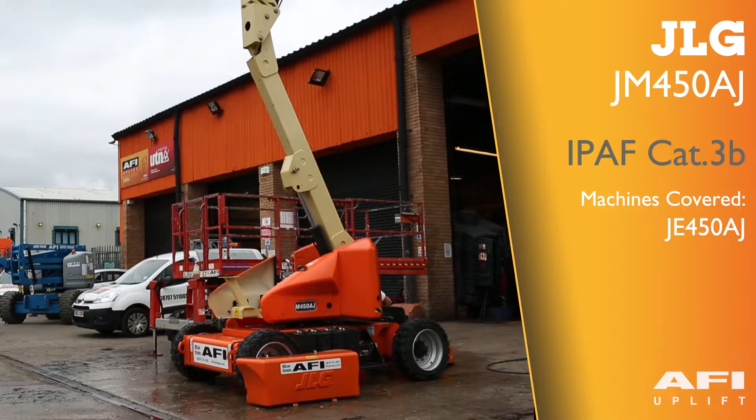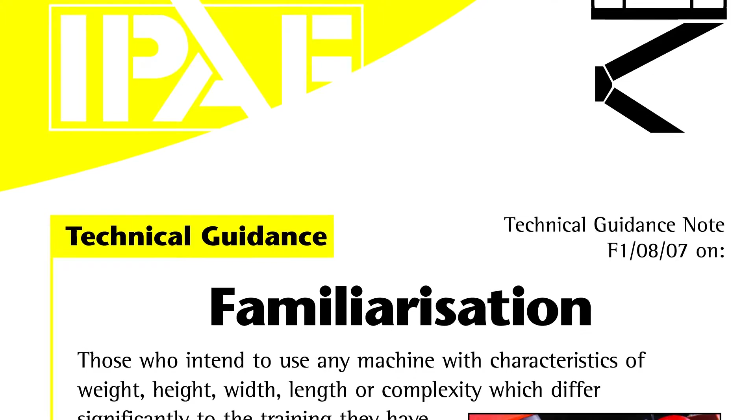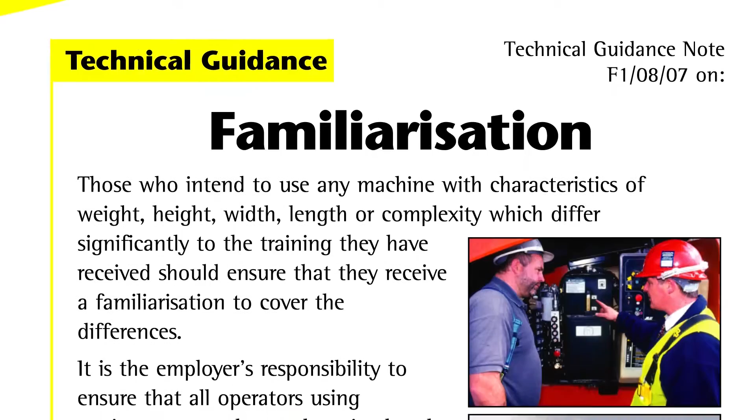Those who intend to use any machine with characteristics of weight, height, width, length or complexity which differ significantly from the training they have received should ensure that they receive a familiarisation to cover the differences. It is the employer's responsibility to ensure that all operators using equipment are adequately trained and familiarised to comply with current health and safety legislation.

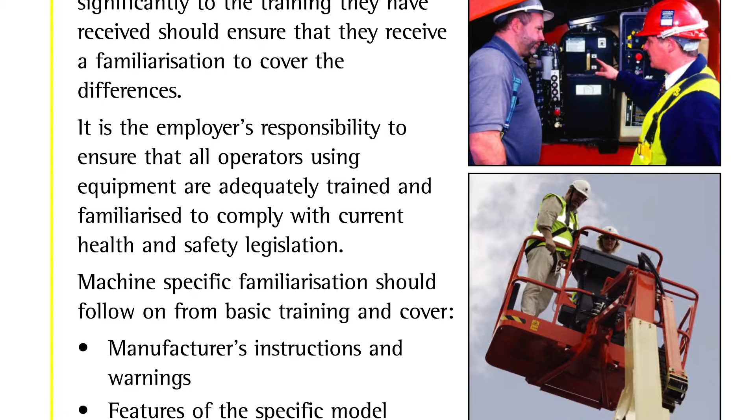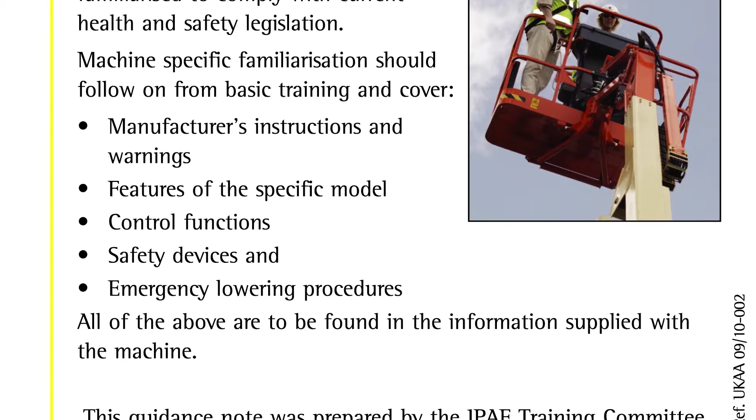Machine-specific familiarisation should follow on from basic training and cover the manufacturer's instructions and warnings, features of the specific model, control functions, safety devices and emergency lowering procedures. All of the above are to be found in the operator's manual supplied with the machine.

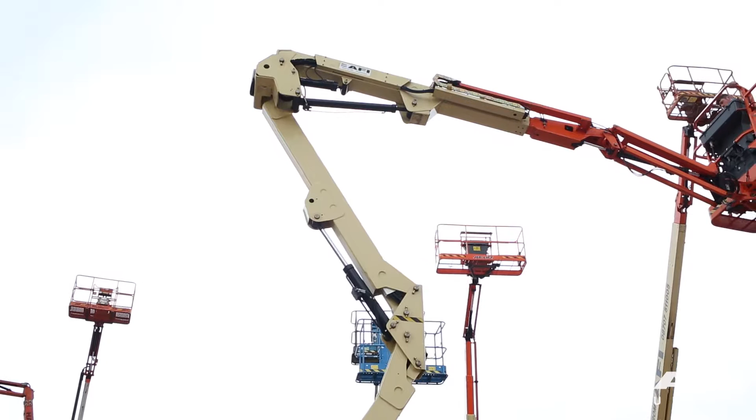The machine is a 45-foot articulated platform with jib. The machine is a bi-energy, which means that the machine is battery powered but has an engine which will charge the batteries up once the batteries drop to a certain level.

The maximum capacity is 230 kilograms or 400 pounds. Maximum travel gradability is 30%. Maximum side slope is 5%.

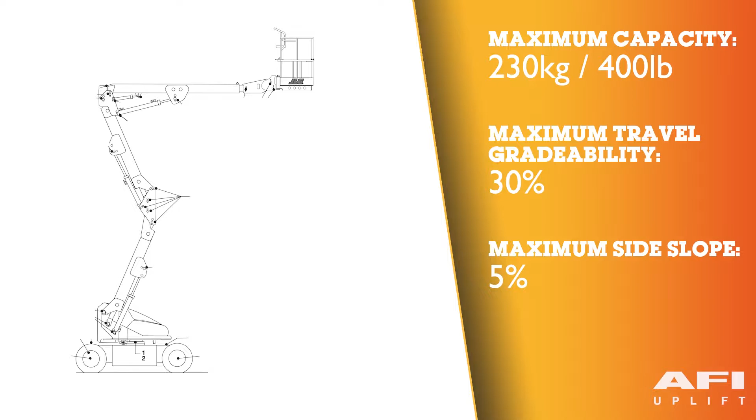Maximum platform height is 45 feet or 13.72 meters. Maximum working height is 51 feet or 15.54 meters.

The up and over platform height is 25 feet 3 inches, 7.7 meters. The maximum horizontal platform reach is 23 foot 9 or 7.24 meters.

The stowed height of the machine is 6 foot 7 inches or 2 meters. Maximum length of the machine is 21 foot 2 inches or 6.45 meters.

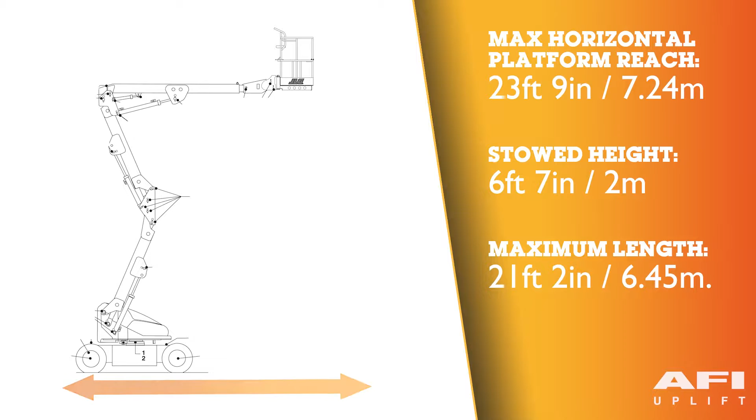The gross weight of the machine may vary. Please check your serial plate and operator's manual for exact details.

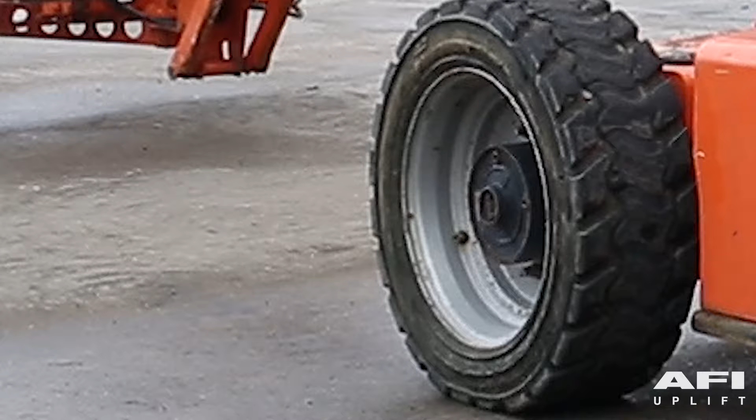The type of tyre fitted to the machine is a foam filled tyre. This will be indicated by a bolt opposite the valve in the tyre.

Parts of the machine: Platform control console. Platform. Upper boom. Mid boom. Lower boom. Turntable. Frame.

Steer wheels. Drive wheels. Battery box. Foot switch. Ground control console.

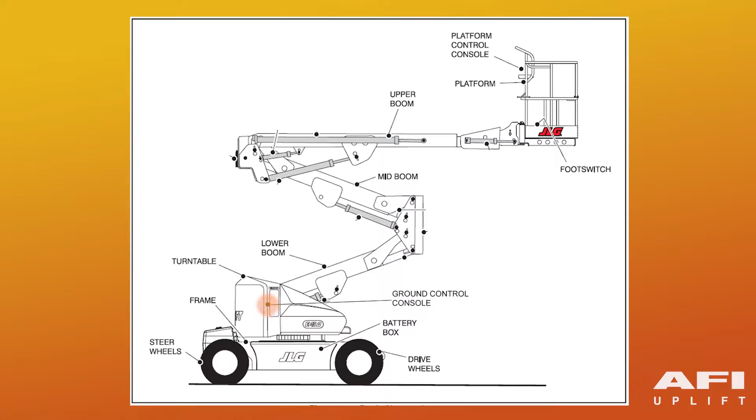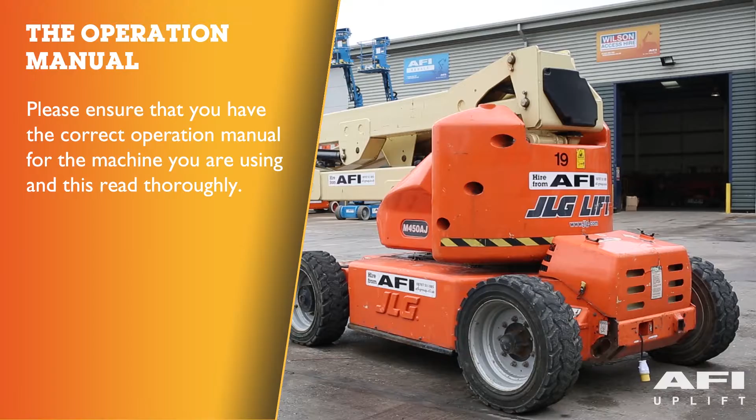The operating manual will be located in the black box in the platform. Please ensure that you have the correct manual appropriate to your machine and that you familiarise yourself with the table of contents in the manual.

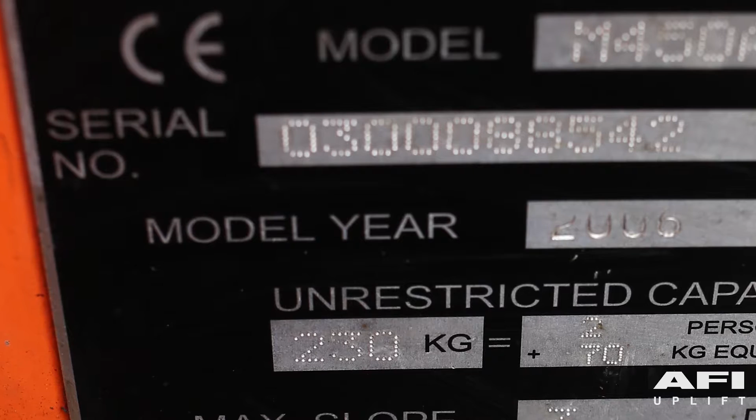Identify the thorough examination plate and ensure that the machine is in date. Locate the manufacturer's data plate and ensure that the serial number corresponds with the thorough examination serial number.

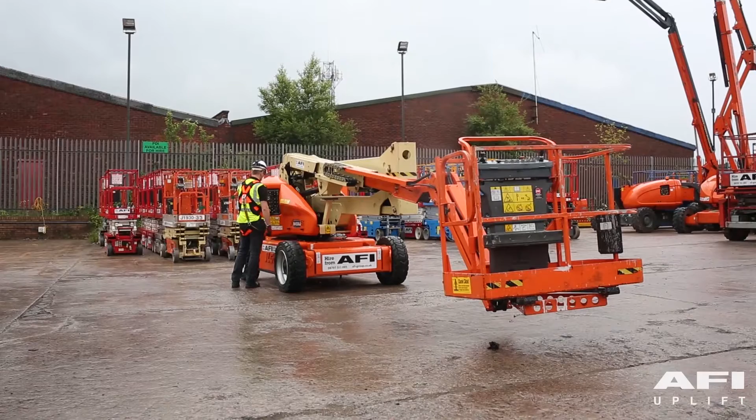Before a machine is put into operation, it must be carefully inspected for any evidence of damage and inspected periodically thereafter. If you do find a fault, isolate, tag and report the machine. Do not attempt any repairs to the machine.

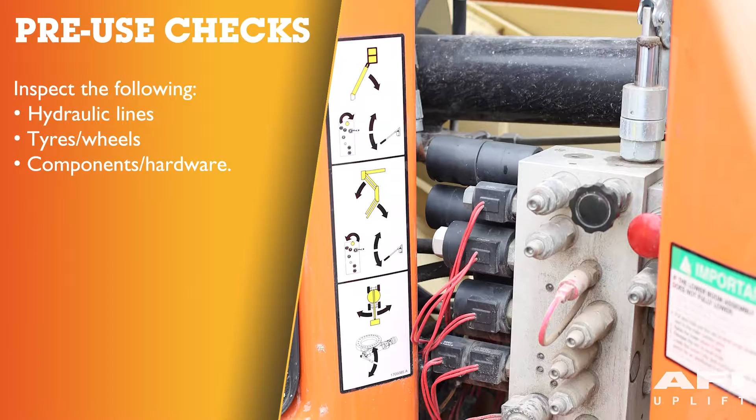Inspect hydraulic lines for any leaks, damage and security. Check all tyres and wheel assemblies for loose, worn or damaged parts. Check components and hardware for security.

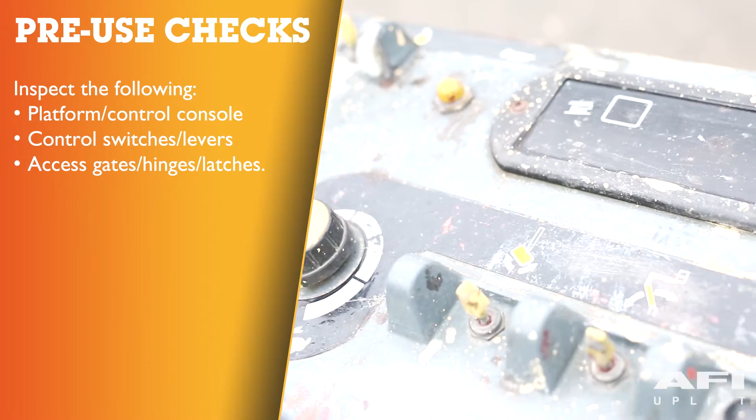Check the platform and control console for any damaged, loose or missing parts. Make sure everything is secure.

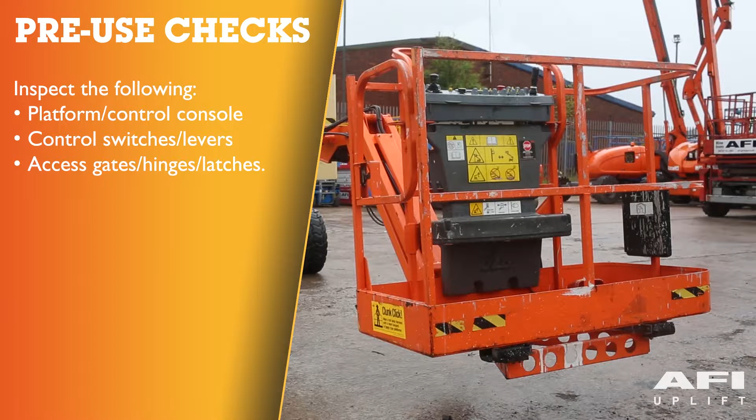Check all control switches and levers for any damage, loose or missing parts. Ensure that levers function properly. Check the access gates, hinges, catches and any latches for proper operation, damage and security.

Check battery for damage, loose or missing vent caps, electrical connections and tightness. Opening the canopy, check the engine bay.

Check the engine for oil leaks, oil level, and check for any loose or missing parts. Look at throttle connections and linkage. Inspect fuel lines for any damage, leaks and security.

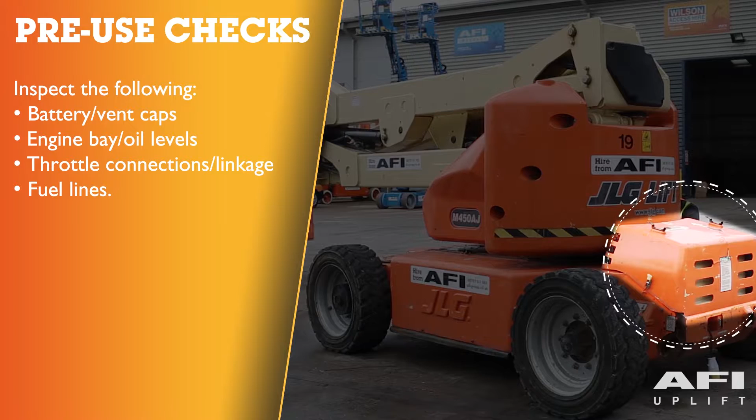Before carrying out any work on batteries, ensure that you're wearing the correct personal protective equipment in accordance with any risk assessment and safe system of work.

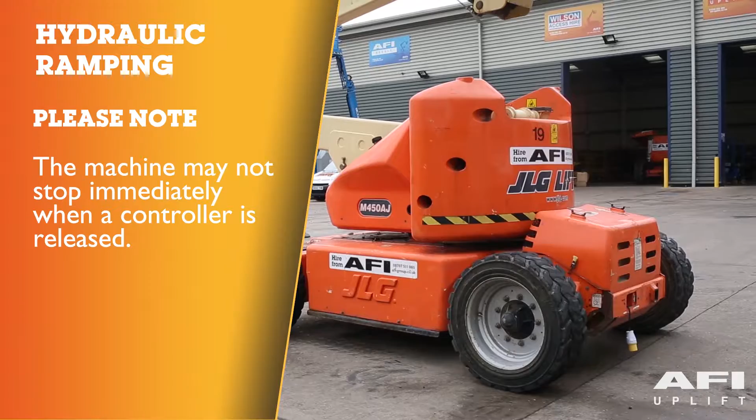Hydraulic ramping: your machine may have hydraulic ramping built into it by design. This means that the machine may not stop immediately when a controller is released.

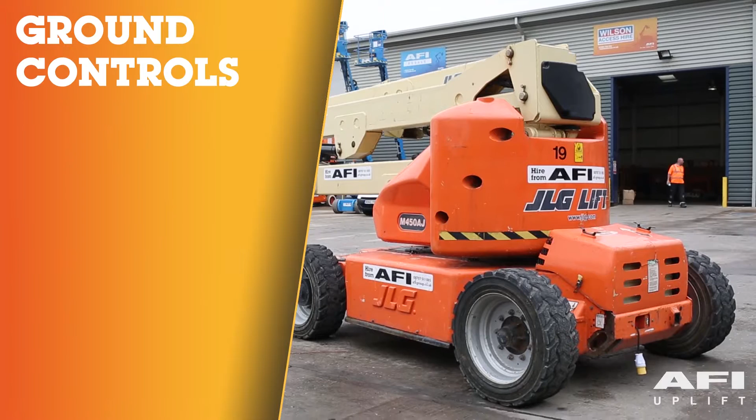Generator or engine start button. The generator or engine start switch allows the generator to be started manually to top off the battery charge. Battery indicator and hour meter.

Telescope, provided for extension and retraction of the upper boom. Swing: the swing control switch provides 360 degree non-continuous turntable rotation. To activate the swing, move the switch to the left or to the right.

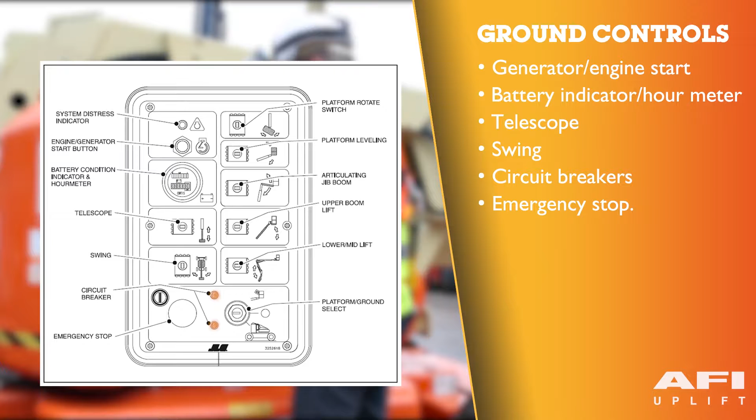Circuit breakers: the circuit breakers open or pop out to indicate a short or an overload somewhere on the machine. Red emergency stop switch: push in to turn off, pull out to turn on.

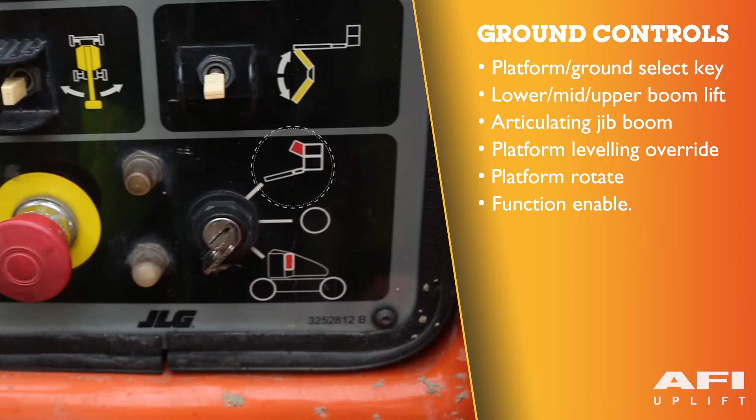Platform, key and ground select switch. A 3-position key operated switch supplies power to the platform control console. When positioned to platform, this will be in the up position. When positioned to ground, this will be in the down position.

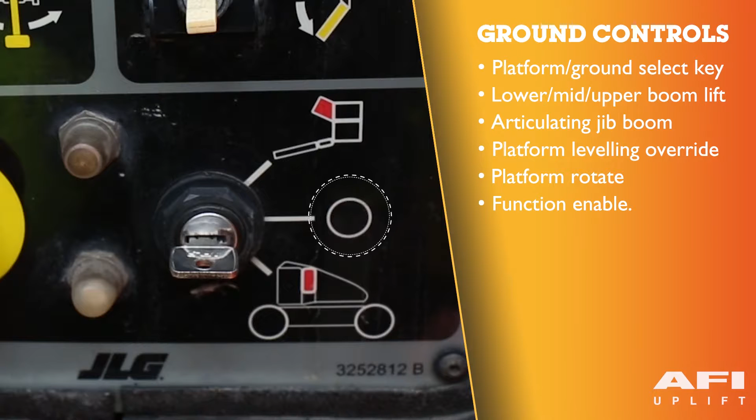Lower and mid boom lift. Upper boom lift. Articulating jib boom.

Platform leveling override: a 3-position level control switch allows the operator to compensate for any difference in the automatic self-leveling system by positioning the control switch up or down.

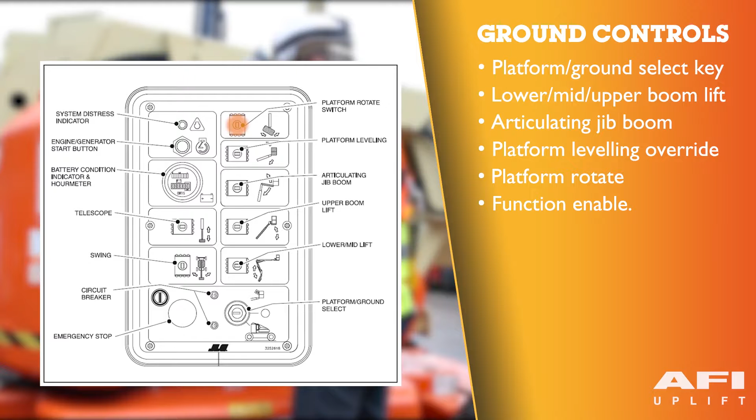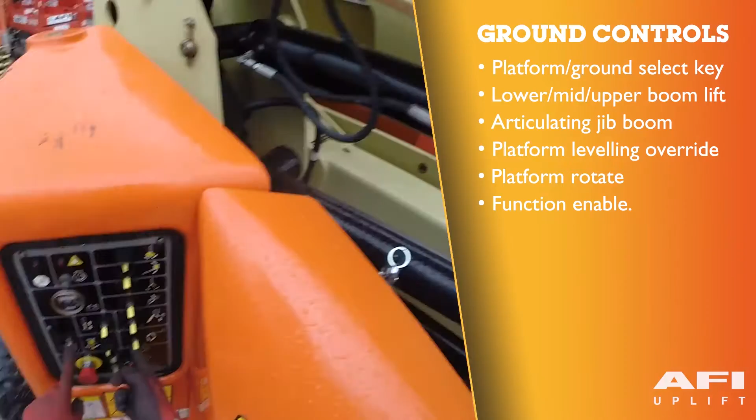Rotate: a 3-position rotate control switch permits rotation of the platform when positioned to the left or to the right. Function enable: if your machine is equipped with the function enable switch, the enable switch must be held down to enable all boom controls when the machine is running.

The platform control console. Posi track control: activating the Posi track switch allows the operator to engage positive traction for the time period preset in the controller.

Platform leveling override: the platform level control switch allows the operator to adjust the level of the platform by positioning the switch to the up or down position.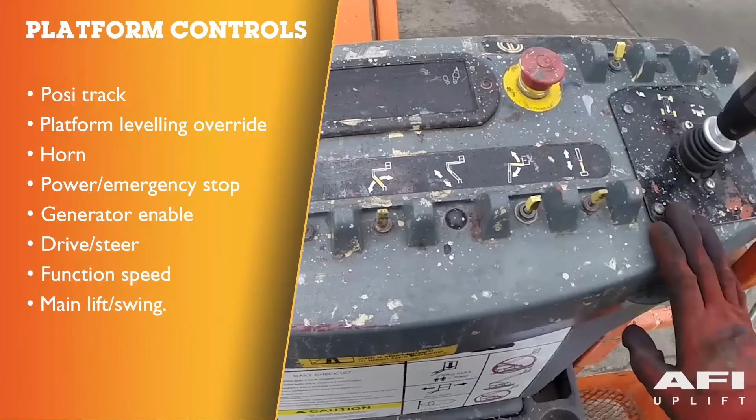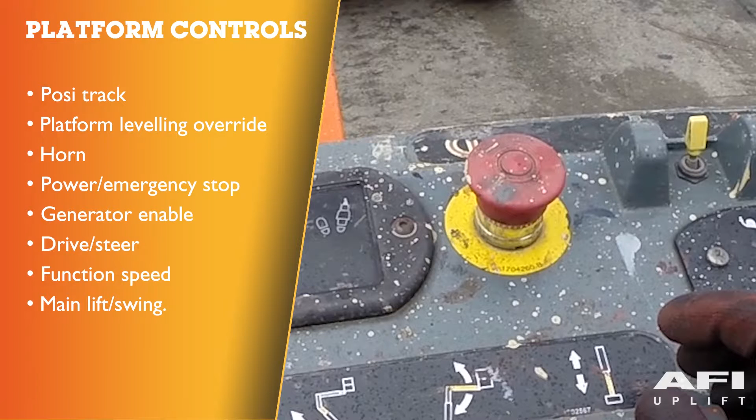Horn. Power and emergency stop: push in to turn off, pull out to turn on. When pulling out the red emergency stop, within about 2 seconds, the machine will perform a diagnostic check of the various electrical circuits, and if everything is okay, the platform alarm will beep once.

Generator enable control: the generator enable control switch, when in the off position, allows the operator to prevent the generator engine from starting when using the machine indoors. Drive and steer.

The drive controller provides for driving either forward or backwards when positioned to the forward or the reverse. Please note the drive control lever is spring loaded and will automatically return to neutral or off position when released.

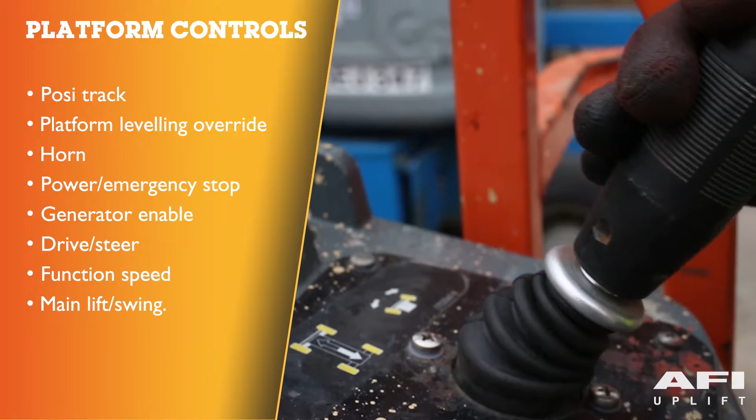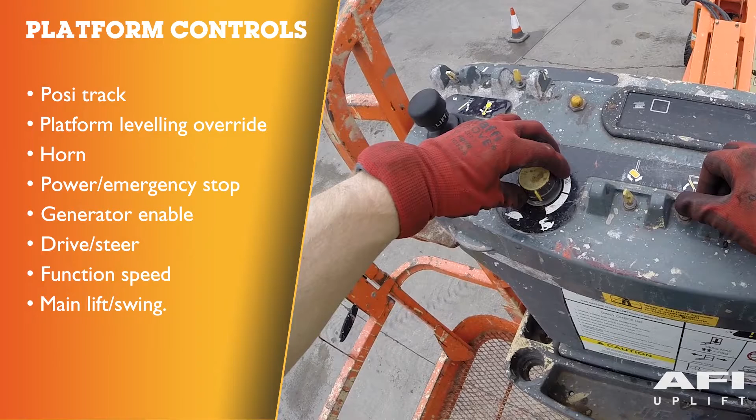Function speed control. Rotate counterclockwise for slower speed and clockwise for faster speed. To turn to creep mode, turn the control fully counterclockwise until it clicks.

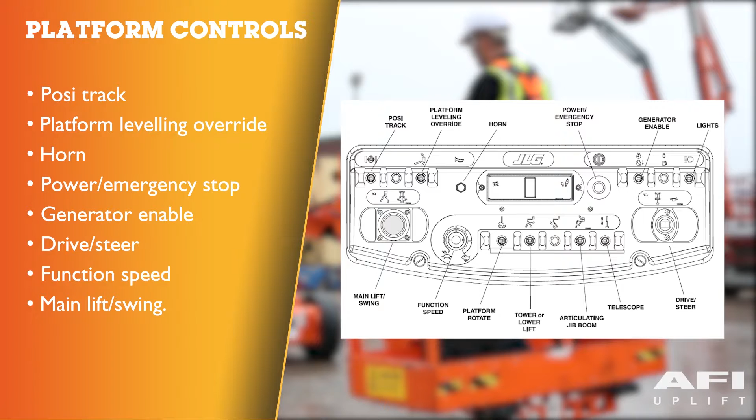Main lift and swing. Push forward to lift up, pull backwards to lower down. Move right to swing and rotate to the right. Move left to swing and rotate to the left. This handle features a round gate, so the maximum speed is reduced when multiple functions are selected.

Platform control indicator panel. Machine out of level. This red illuminator indicates that the chassis is on a slope, over 3 degrees.

System distress indicator. The system distress indicator lights to signify an abnormal condition for the generator engine, or on all electric machines, an electrical system fault.

Posi track indicator. Enable indicator foot switch. The enable indicator shows that the controls are enabled. Creep speed indicator. When the function speed control is turned to the creep position, the indicator acts as a reminder that all functions are set to the slower speed.

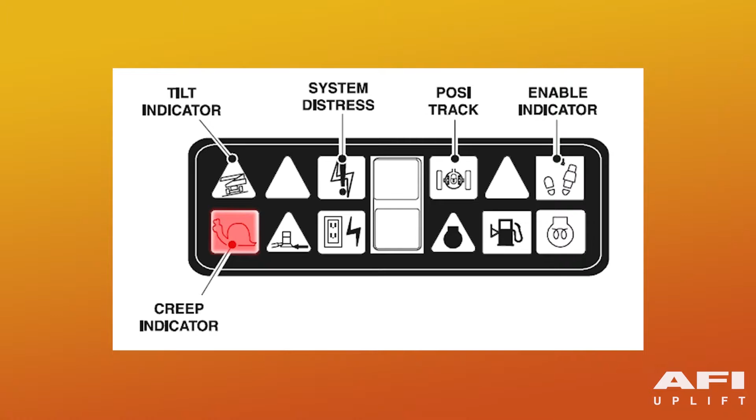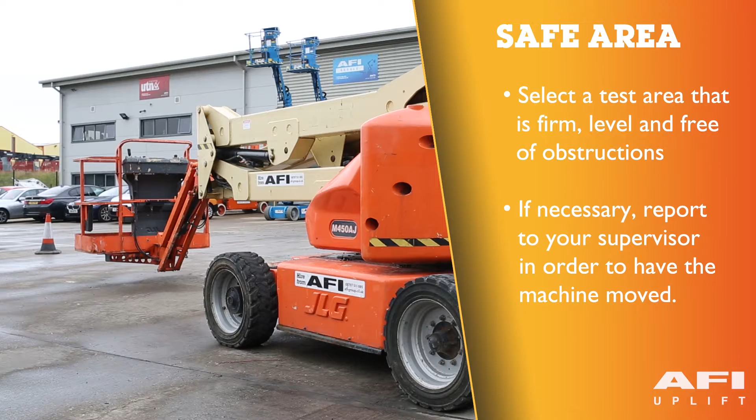A functional check of all systems should be performed once the walk-around inspection is complete. This must be carried out in an area free and clear of overhead and ground level obstructions. If this is not the case, contact your supervisor or manager who will have the machine moved and located to a more suitable area.

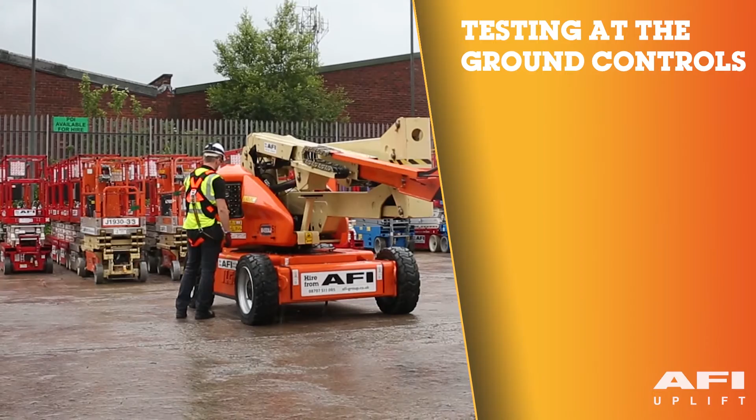Check all functions controlled by the ground controls. Please note, to avoid serious injury, do not operate the machine if any control levers or toggle switches controlling platform movements do not return to the off position when released.

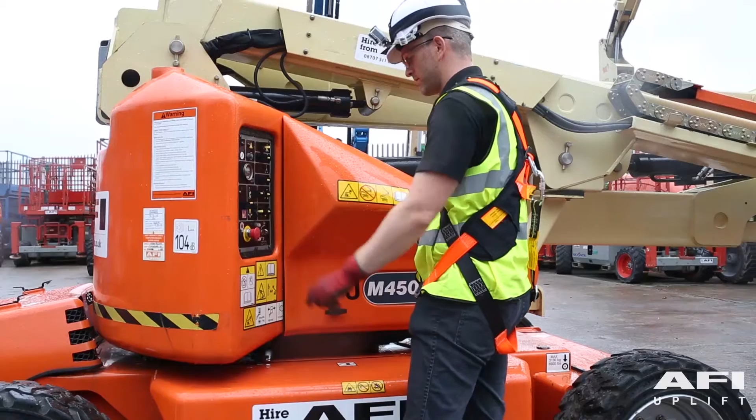Raise and lower the boom. Check for smooth operation. Check that the platform self-leveling system functions properly during the raising and lowering of the boom.

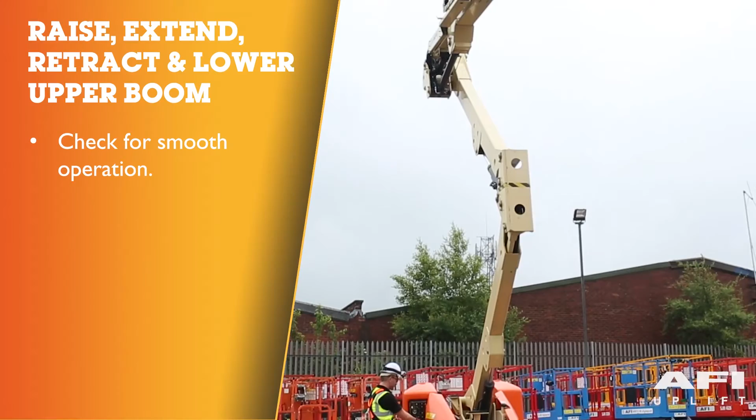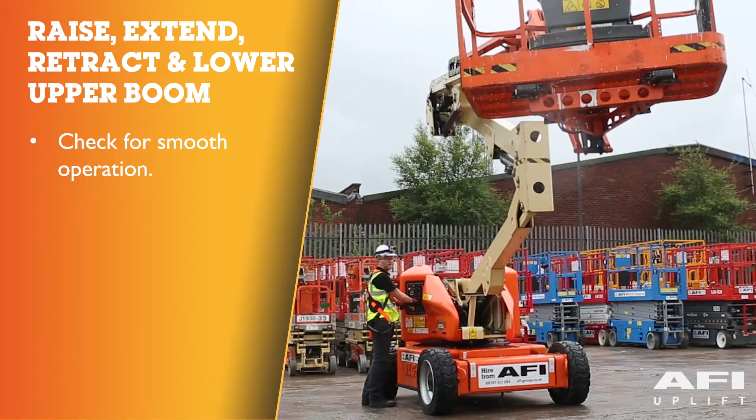Raise, extend, retract and lower the upper boom. Check for smooth operation. If the tower boom does not rest on stops with the machine in the stowed position, this would indicate that the upright is out of plumb.

Telescope the boom in and out several cycles at various degrees of elevation lengths. Check for smooth telescope operation.

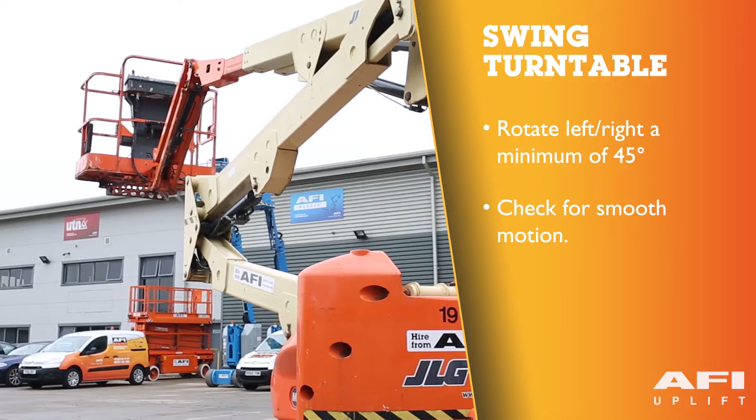Swing turntable to the left and the right a minimum of 45 degrees. Check for smooth motion.

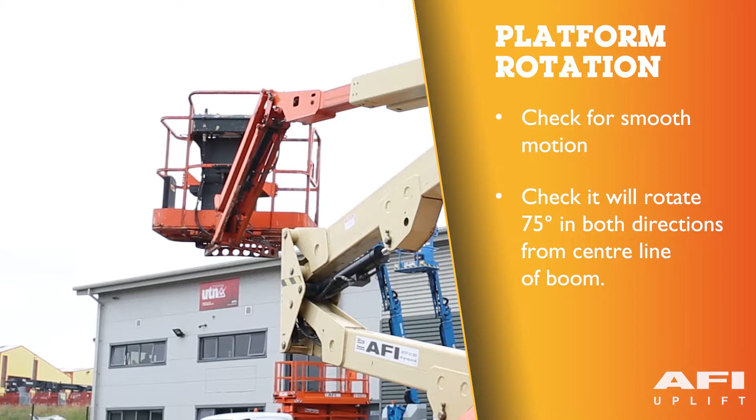Check the rotator for smooth operation and assure that the platform will rotate 75 degrees in both directions from the centre line of the boom.

The manual descent system is used in the event of total power failure to lower the upper and lower booms using gravity. To operate the manual descent system, proceed as follows.

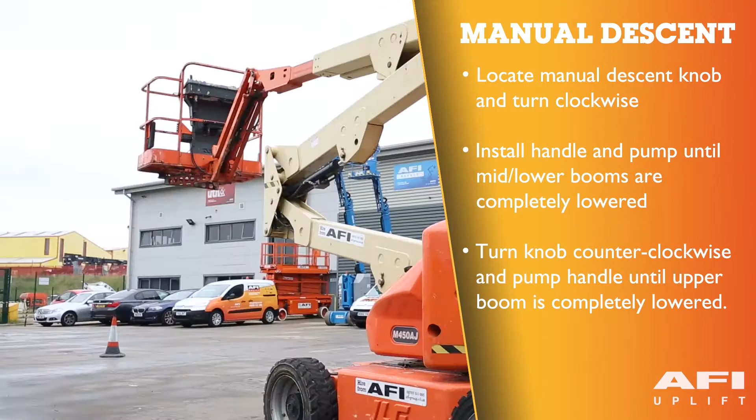Locate manual descent control on the main valve and turn clockwise. Install handle into the manual descent pump and lower the mid and lower booms by pumping the handle until they are completely lowered.

Turn manual descent control counterclockwise and lower the upper boom by pumping the handle until it is completely lowered. Return manual descent control to the centre position and stow handle in the bracket provided.

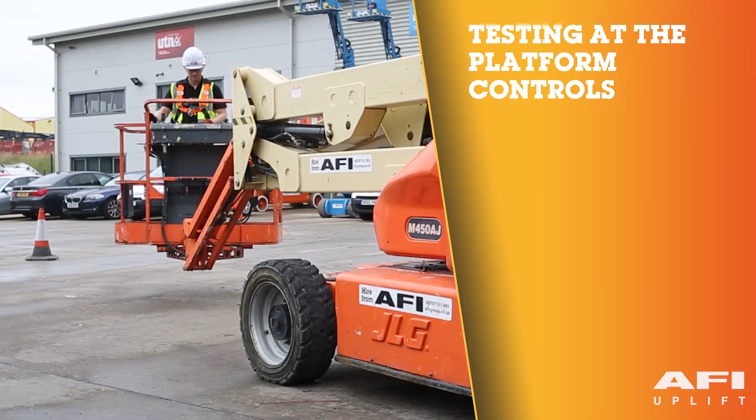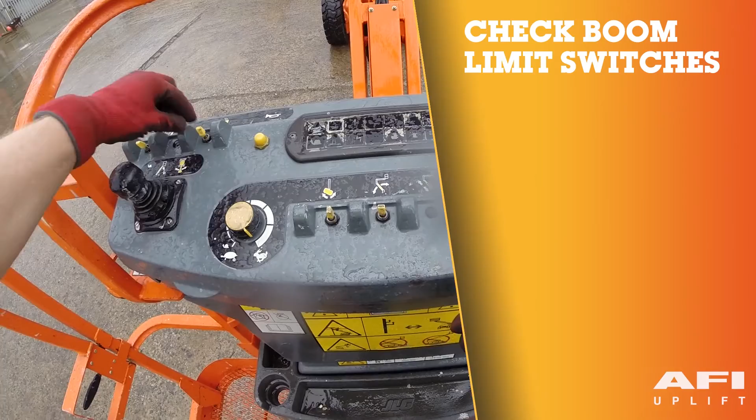Foot switch. With foot switch depressed, operate lift and hold control. Take your foot off the foot switch, the motion should stop. If it does not stop, shut down the machine, isolate and tag the machine.

Raise and lower the boom. Check for smooth operation. Check that the platform self-leveling system functions properly during the raising and lowering of the boom.

Raise, extend, retract and lower the upper boom. Check for smooth operation.

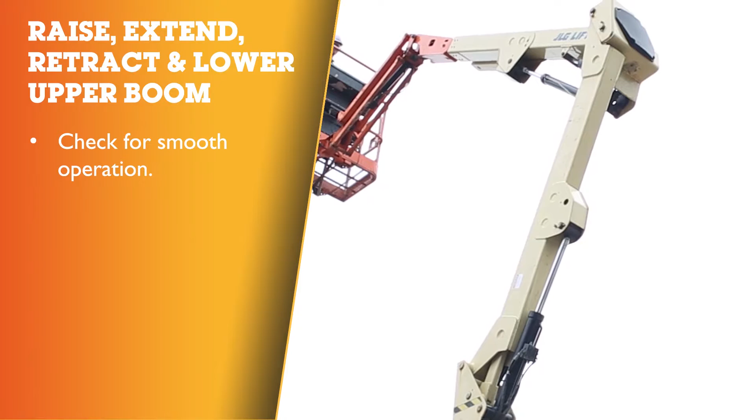Telescope the boom in and out several cycles at various degrees of elevation lengths. Check for smooth telescope operation.

Swing turntable to the left and the right a minimum of 45 degrees. Check for smooth motion.

Check the rotator for smooth operation and assure that the platform will rotate 75 degrees in both directions from the centre line of the boom. Drive forward and reverse, checking for proper operation.

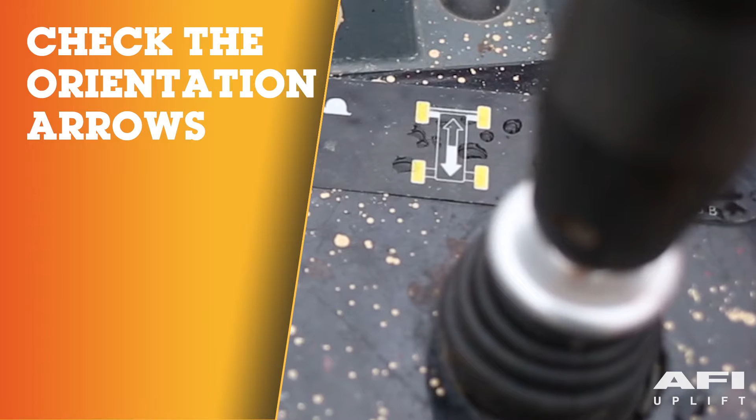As with any drive in motion, please ensure that you check the orientation arrows on both the chassis and the platform controls. Move the drive controls in a direction which matches their directional arrows.

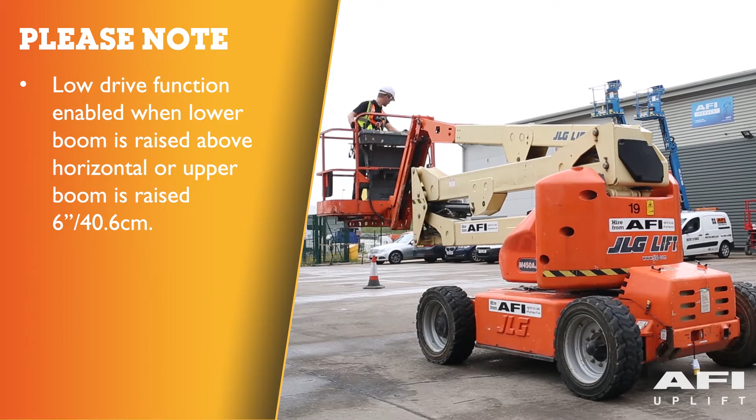When the lower boom is raised above the horizontal or the upper boom is raised approximately 6 inches or 40.6 centimeters, the high drive function will automatically be in low drive. This will mean that the machine will drive at a much slower speed.

Steer left and right, checking for proper operation.

Turn the key to ground controls. The platform controls should now not operate. Turn the key to the off position. Both platform and ground controls should not operate.

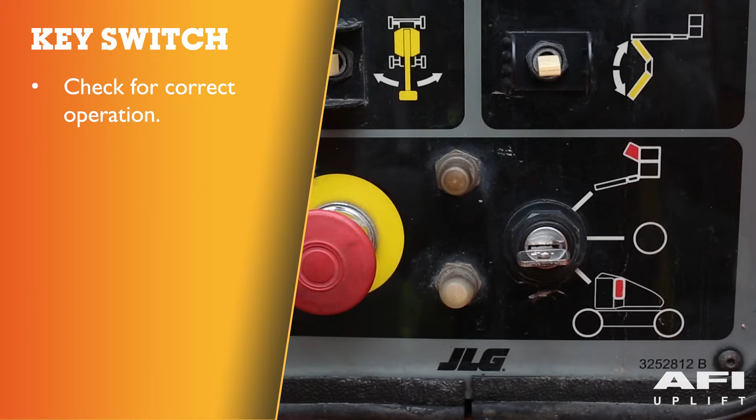Check the chassis out of level indicator located on the platform control console by driving with the machine in a level position up a suitable ramp. Check the out of level alarm with the machine on the ramp.

Raise the upper boom until it is parallel with the chassis. Do not raise above the parallel position. If the light does not illuminate, return the machine to a level surface, shut down the machine, isolate, tag and report the machine to your supervisor.

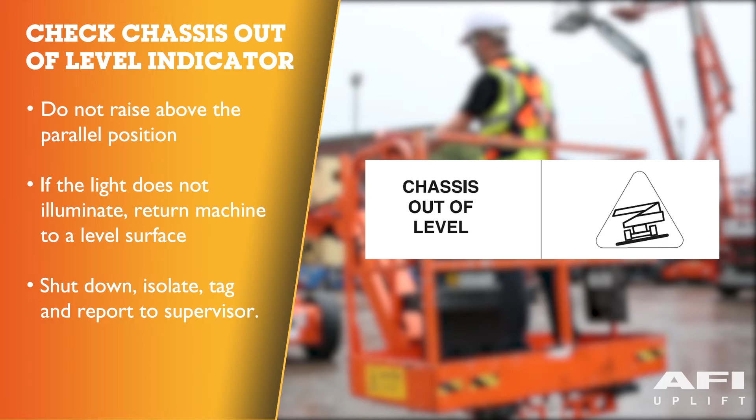Please note, to avoid serious injury, do not operate the machine if any control levers or toggle switches controlling platform movements do not return to the off position when released.

To avoid a collision and injury, if the platform does not stop when a control switch or lever is released, remove foot from foot switch or use emergency stop to stop the machine.

To shut down and secure the machine, drive the machine to a suitable flat surface. Ensure the main boom is fully retracted and lowered over the rear drive axle. Remove all load from the platform and allow the engine to operate at 3 to 5 minutes on the low setting to reduce the engine temperature.